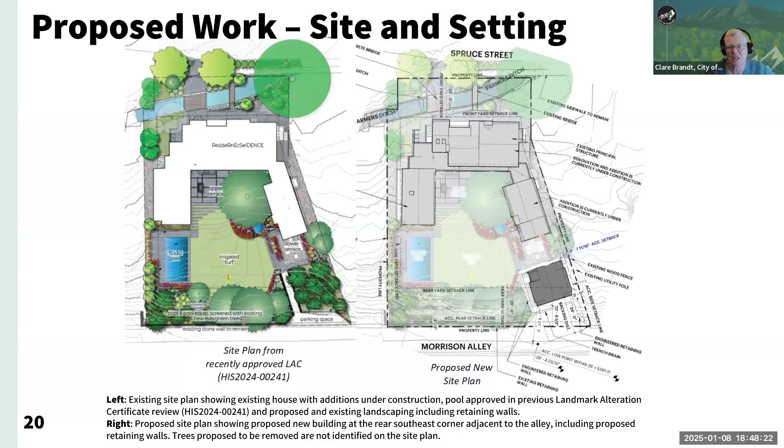The driveway is proposed from the alley, which is right here, to the new accessory building. It's angled to give a minimum of 13 feet to the alley, and it's 23 feet on this side.

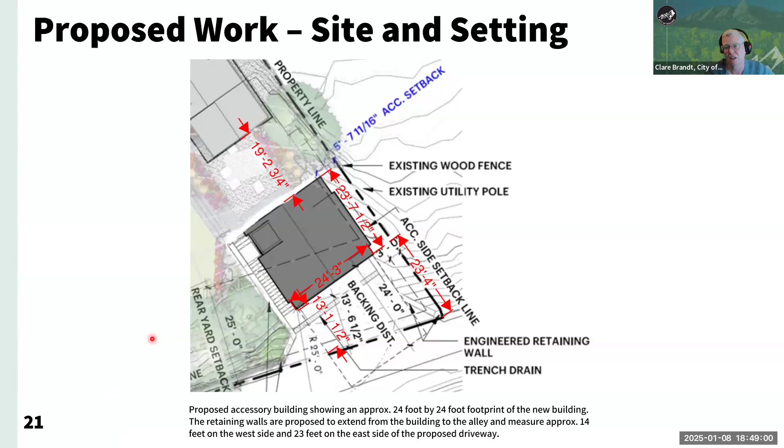The closest existing accessory building is on this side right here, and it's about 60 feet away, so it's not close. There's another accessory building on the other side, which is even further—about 100 feet from the neighboring building on this side.

Our guidelines note that accessory buildings and parking should be at the rear and accessed from the alley, that you should preserve a backyard space and the general proportion of built mass to open space in the area should be retained, and that a new building shouldn't detract from the overall historic character of the principal building or site, or require removal of a significant historic building element or site feature such as a mature tree.

Staff finds that the proposed new building reflects the traditional relationship of the building on the site. It's located at the rear, as you can see, with access from the alley. It does not detract from the overall historic character of the principal building, which is all the way up here, or the site. The proposal is consistent with the general proportion of built mass to open space found within the area, and the backyard area is preserved mainly due to the large size of the lot.

We had in the memo that mature trees needing removal should be reviewed as a condition of approval, but Hal and Skylar are here, and one thing they've let me know is that there are no mature trees proposed for removal, and they can talk to you about that as well.

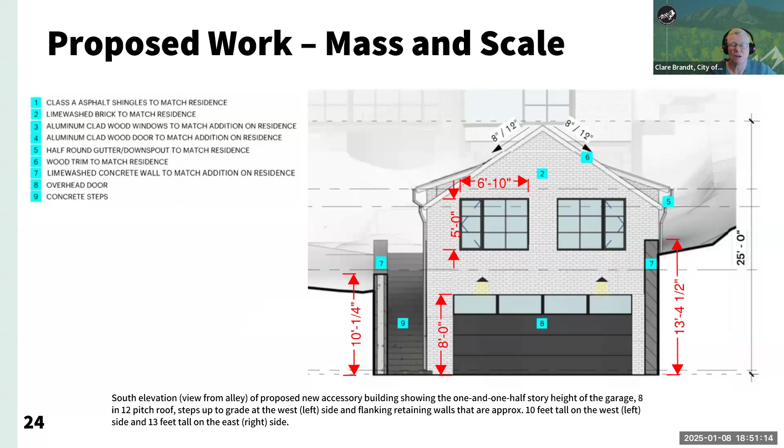It's proposed to be constructed of lime washed brick with a moderately steep pitched front gable roof, an 8 and 12 pitch, pretty shallow eaves, and a pair of wall dormers, one on each side.

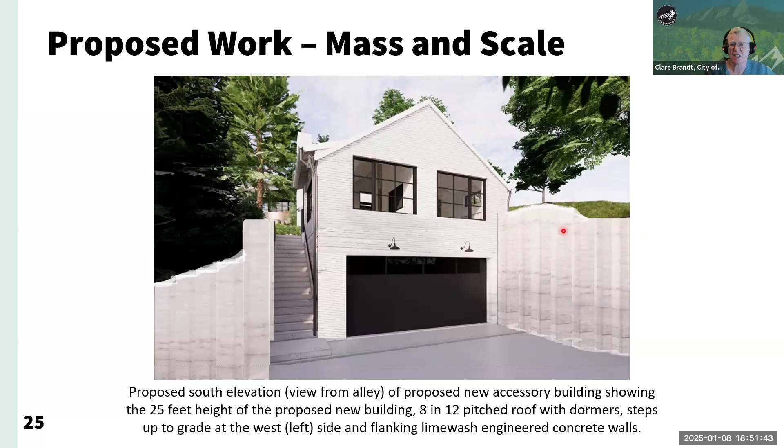There's an exterior concrete stair that follows the west side of the proposed building from the alley grade down here. The entrance of the accessory building is proposed to be flanked by a 10-foot tall retaining wall on this side, and a 13-foot engineered concrete retaining wall on this side.

The guidelines emphasize that accessory buildings should generally be small in scale and secondary to the primary structure. They should be simply detailed. Buildings along the alley should be in a variety of shapes, size, and alignment, should maintain a human scale and be sensitive to pedestrians. Efforts should be made to maintain the character of the alley and respect neighboring buildings and the alleyscape. The roof form and pitch should be complementary to the primary structure, and door and window sizes and patterns should harmonize with the historic context rather than compete with or copy it.

New garages should generally be 1 story tall and shelter no more than 2 cars. And in some cases, a 2-car garage may be inappropriate.

We found that the mass and scale of this proposed new building is subordinate and clearly secondary to the primary building. Its simplicity with a traditional form and punched window and door openings is complementary to the character of the house and alley and harmonizes with the historic context.

The gable roof form of the proposed new building is complementary to neighboring accessory buildings, and in general, the proposed building helps maintain a variety of shape, size, and alignment of buildings along the alley. We did have concerns about the proposed retaining walls and thought that they didn't help maintain a human scale in the alley.

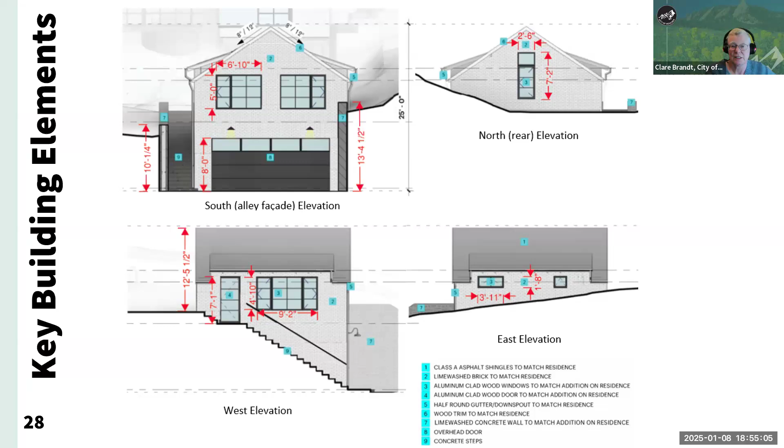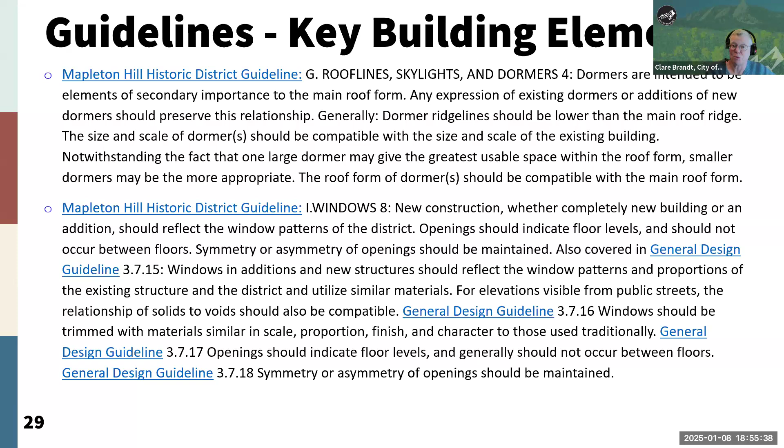So the key guidelines for key building elements include recommendations to keep the dormers secondary elements with ridge lines lower than the main roof ridge, and that the size and scale of dormers should be compatible with the existing building. Window openings should indicate floor levels and reflect the window patterns and proportions of the existing structure and the district, and the relationship of solids to voids should be compatible. Windows should be trimmed with materials similar in scale, proportion, finish, and character to those used traditionally.

This one goes on for 2 pages. The garage doors should be consistent with the historic scale and material of traditional accessory structures. Wood is the most appropriate material, and two smaller doors may be more appropriate than one large door. Doors should reflect the proportions, the height and width of doors in the existing structure and or the district.

And the guidelines also advise to take design cues from the primary structure on the site, but be simpler in detailing and smaller in scale than similar elements on primary structures.

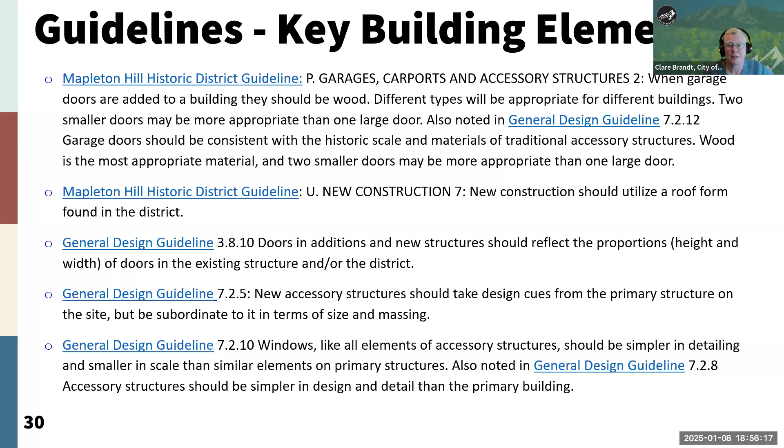We found that the proposed accessory building does take those design cues from the primary building, including the general solid to void ratio of the window and door openings, and the reflections of the architectural style with the minimal ornamentation and divided light casement windows, and the gable roof with slightly overhanging eaves.

The dormers are secondary to the main roof form, lower than the main roof ridge, and the size is compatible with the size and scale of the building. The windows and door patterns for the building are generally reflective of the pattern and proportion found on the primary building, and take cues on size, proportion, and location in proportion to the eaves of the primary building.

The double garage door, we thought maybe two smaller doors could be more appropriate than one large door. However, we're very aware of the alley and how tight it is and how steep the drop off. So we thought that maybe single doors might be impractical for that alley turn, and that this should be investigated and resolved as part of the conditions of approval. And again, Hal can speak to that today.

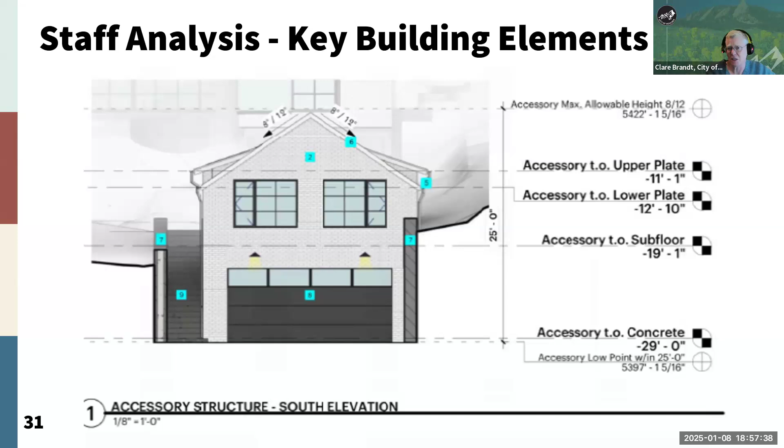The materials proposed for the new accessory building include lime washed brick with wood fascia to match the primary house, aluminum clad windows and doors, and half round guttering. The garage door is proposed to be 2-car overhead. The retaining walls and exterior steps are proposed to be concrete, and the retaining walls are proposed to be lime washed.

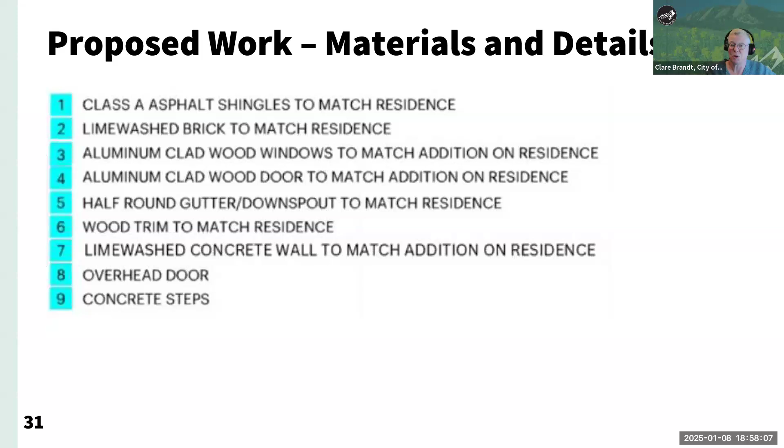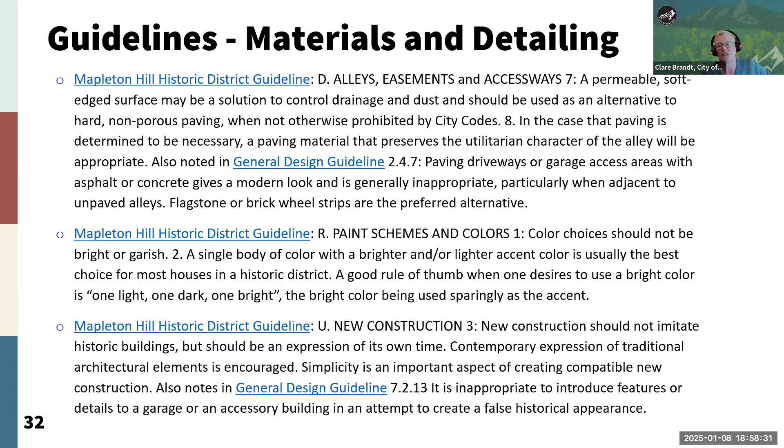The guidelines for materiality and detailing favor the use of a permeable soft edge surface over hard non-porous paving or concrete, which gives more of a modern look and is generally inappropriate. The guidelines also say that color choices should not be bright or garish, and there should be simplicity in new construction.

Building materials should help establish a sense of scale and be compatible with those found on the primary structure and in the district, including the use of wood garage doors. Again, a recommendation to use wood.

On retaining walls, the guidelines state that tall, plain concrete retaining walls are inappropriate, and regrading and the introduction of new retaining walls is inappropriate.

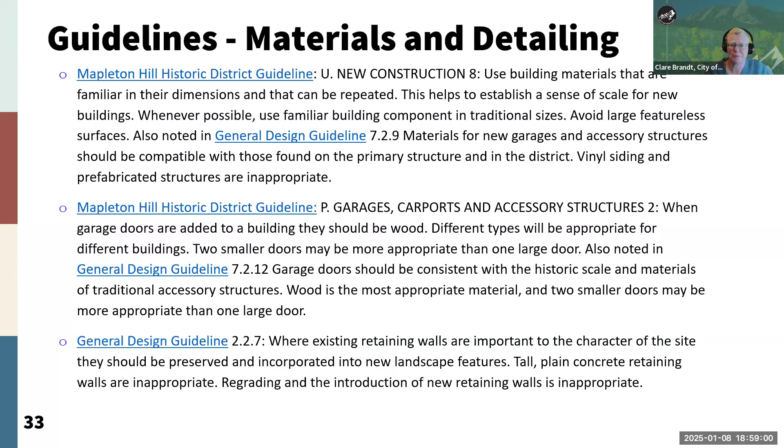We found that the proposed use of concrete for the engineered retaining walls gave too much of a modern look and would be inappropriate in the context of the historic district in this alley, and recommended that the retaining walls should be redesigned to reflect the design, materiality, and character of existing stone retaining walls found on site.

Additionally, the proposed driveway should be permeable, not concrete, and crusher fines, flagstone, or brick could be specified as a condition of approval.

We thought that the lime wash white brick proposed for the building is reflective of the primary building.

Usually we say that wood doors and windows are most appropriate for the historic district. However, the aluminum clad windows are reflective of the primary house where steel windows were used, and it also identifies the garage as new construction and of its own time. Staff considers that aluminum clad windows are appropriate in this location.

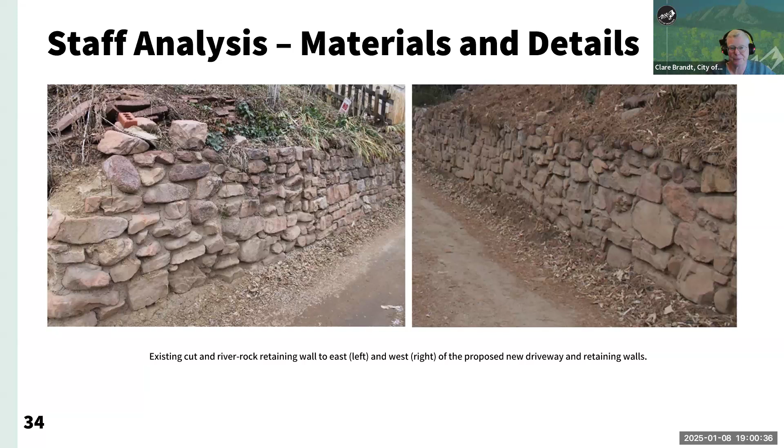Staff let us know that the garage door will be proposed in wood, but we should also review the lighting as part of the conditions of approval.

So in addition to compliance with the guidelines, the standards for issuance of a landmark alteration certificate are outlined in 9-11-18B of the Boulder Revised Code.

The issuance must meet the conditions of whether the proposed application preserves, enhances, or restores and does not damage or destroy the exterior architectural features; whether the proposed application adversely affects the special historic architectural aesthetic interest or value of the property; and if the architectural style, arrangement, texture, color, and materials used on existing and proposed structures are compatible with the character of the landmark property.

We found that the proposal meets the standards for issuance of a landmark alteration certificate, and is generally consistent with the Mapleton Hill design guidelines and the general design guidelines, providing the stated conditions are met.

The buildings at the rear respect the traditional relationship of buildings on the site, and do not detract from the overall historic character of the principal building or the site.

It is consistent with the general proportion of built mass to open space. It's subordinate to the primary building and helps maintain a variety of shape, size, and alignment of buildings along the alley, and takes design cues and is reflective but not replicative of buildings in the district.

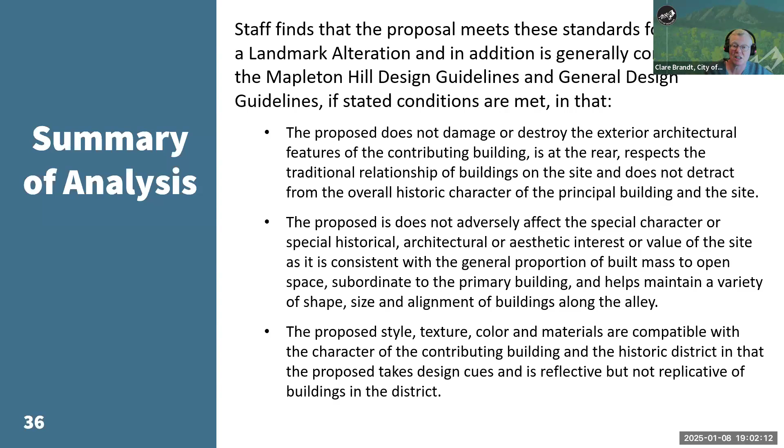The conditions of approval should address the following to be consistent with the guidelines: that the proposed use of concrete for the engineered retaining walls gives a modern look and is inappropriate in the context of the historic district, and that the proposed driveway should be permeable, not concrete.

A pair of single car garage doors would be appropriate unless it can be demonstrated that this is impractical for the alley turn, and that removal of mature trees should be avoided if possible.

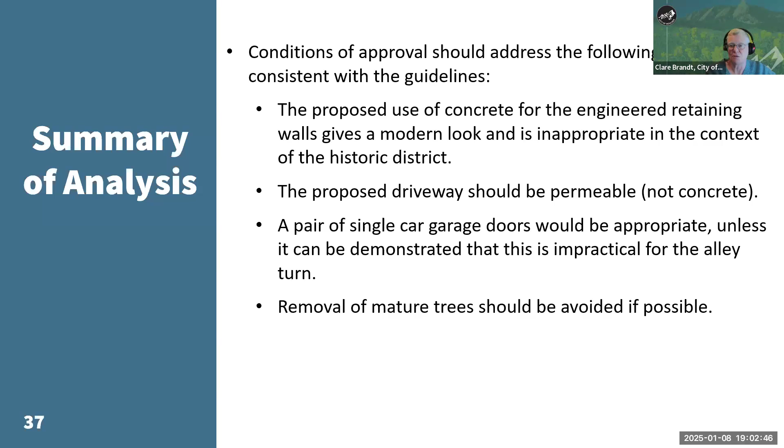The staff's recommendation is to approve the application with conditions, finding that it meets the standards of issuance and is generally consistent with the guidelines, provided the stated conditions are met.

We provided some draft conditions that would include revising the retaining walls to reflect the design, materiality, and character of existing stone retaining walls found on site; revising the design to transition and visually blend the existing and proposed retaining walls; revising the design to show a pair of single car garage doors unless it can be demonstrated that this is impractical for the alley turn; noting mature trees to be removed; and providing details on materiality for the driveway, the garage door, and exterior lighting.

We also had a note in there that the proposal may require the closing of the Spruce Street curb cut, and that the applicant should provide details on how that would occur if that is the case.

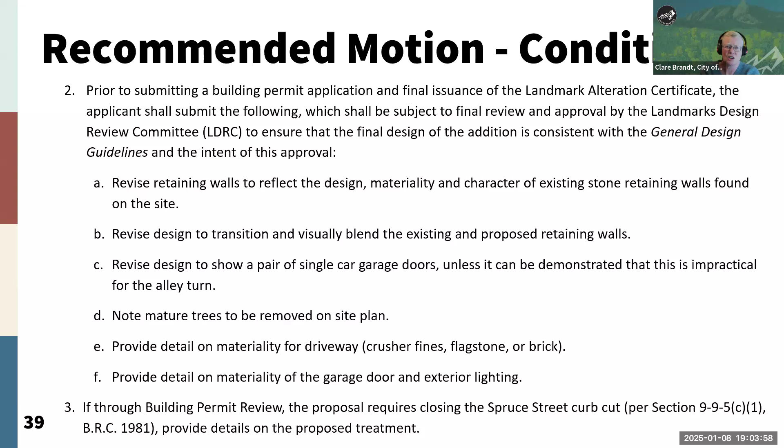So we recommend that the Landmarks Board find that the project meets the standards of issuance.

Yeah, I'm not going to go over this again. Sorry, it's a bit repetitive this time. I don't know what happened.

Okay, so board deliberation. We've allocated about 30 minutes for deliberation, and generally the question is whether the project meets the standards for issuance. I've said them enough that you probably get them, but here are some additional prompts if you need that to help the discussion, we can bring those back up.

So that's the end of the staff presentation. Next steps in the process: the owners, Hal and Skylar, are here and they have up to 10 minutes to present to the board. The board may then ask questions, and we'll then hear comments from any member of the public who wishes to speak. The applicants may have additional time to address anything said during public comment, and then the board will deliberate once everybody has muted their computers again.

So any questions for me before we hand it over to Hal and Skylar?

Clare, I don't have a question, but thank you for that incredibly comprehensive and thorough presentation. I really, really appreciate it. That was amazing. All right.

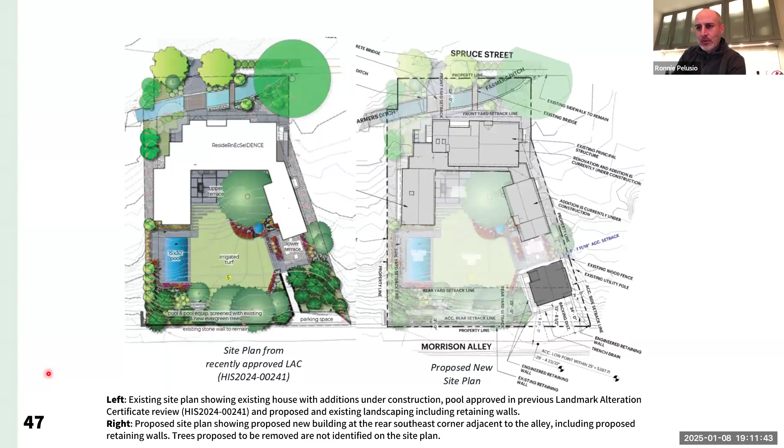My question really, Hal, and I hope to have a conversation with my fellow board members about this, is whether or not the wall is actually as tall as what is shown in the 3D model, and if there's an intention to step the wall down to lower it at the alley. Also, I'm assuming that this might be taller than what is needed, but it might not be. And my last question is, have you explored tiered walls as opposed to one large vertical plane?

Yep. So that's actually probably the most relevant thing to talk about for this, because the original design, which was where these images came from... concrete walls are not really our favorite, or even engineered walls. One of the things we've been discussing with our landscape architect, and we met with our builders this week as well to talk about this—

is can we use more natural stone to build a stone embankment that goes up, because we have a lot of red stone and other stones from the property that we've pulled out during excavation, and we would much prefer it to be a stone wall and or sort of stone tiers like what you're talking about. I don't think that we need this tall of walls, to be honest. That's one of the things we're just going to have to explore.

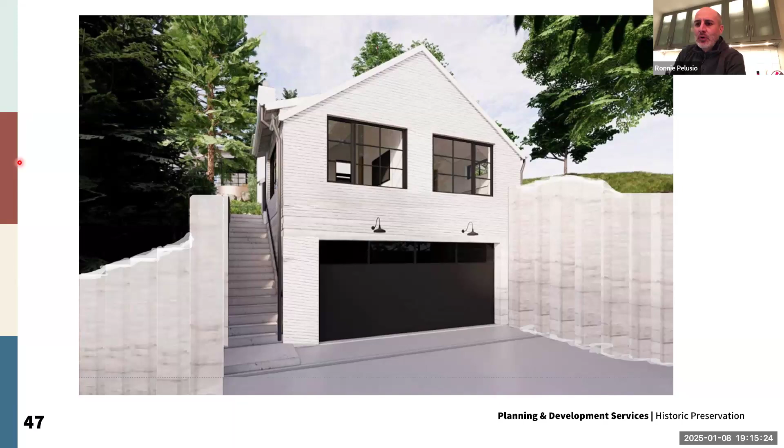Okay, that's helpful. I think I have some direction to maybe have a discussion with the board, and if we have more questions, we might have the opportunity to ask more if they come up, but I feel like my questions are currently answered. Yeah, to your point, there is a horizontal line that goes across the main house, and it's all concrete below that line and brick above it.

Got it. And then the original house itself is in stucco and brick. Okay, I think I understand it.

Thank you. Renee or John, any questions for the applicants before we turn to public comment for this item?

I have two questions. One is about the windows on your addition. I saw in one of the 3D renderings it looked like it had a fixed piece of glass with divided lights - is that different from the rest of the house? Oh no, it's actually very similar to both the windows on the original house and the windows on the addition. Okay, so it was just the 3D rendering - sometimes the lines don't come through clearly.

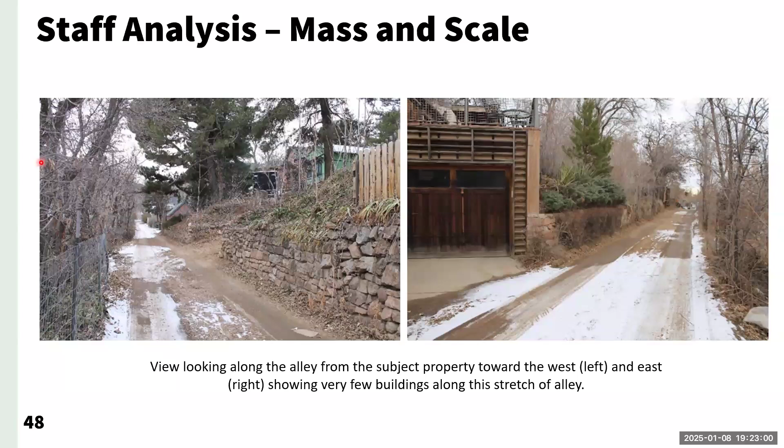Hi everybody. Well, I was involved, gosh, when James Hewat was still with us, and we discussed this property and the historic stone wall. This is a question as much as anything that will go to Marcy and Clare. At that time, as I remember, the wall was declared to be a contributing feature of this site, and pretty much part of the site, not to be disturbed. So I'd like some background on how we got from it being a really important part of the site to so much of it now removed. I went through that alley in the last few days, and it seems more than 20 feet of that wall has been removed. I'm wondering what the process was for getting permission to remove that wall.

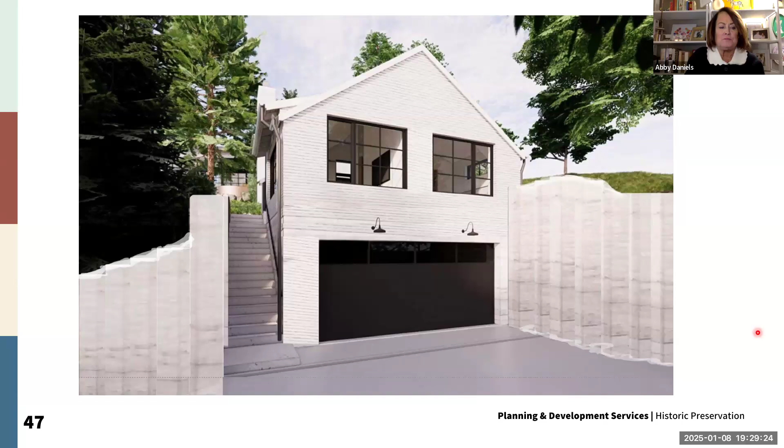Welcome, Fran. I'm going to ask you to swear to tell the board the full truth, then state your name once more for the record and begin. Okay, I promise to tell the truth and my name is Fran Sheets.

I think I have a couple things people probably aren't going to like, because I was here in 2020 when the other approvals came in on the house additions, and I really feel like the back end of this lot has been dramatically changed. It's a reflection on a really historic, rare historic alley, and I think it needs to be done really carefully.

I remember very distinctly trying to defend that wall that James claimed was very historic, and I measured 25 feet of it gone. I'm wondering how that happened, because I remember James being quite clear he didn't want that wall disturbed. The whole back end of the lot, if I remember correctly, has been changed dramatically, and this adds to it.

I know we need to put up all the ADUs in this town that we possibly can, but I think this is larger than anything else on that alley. I would like it to blend into the alley and not stand out as much as this drawing appears to do. I would really love to know how we can repair the lost historic wall there, and how we can let it sit down a little more in terms of the history.

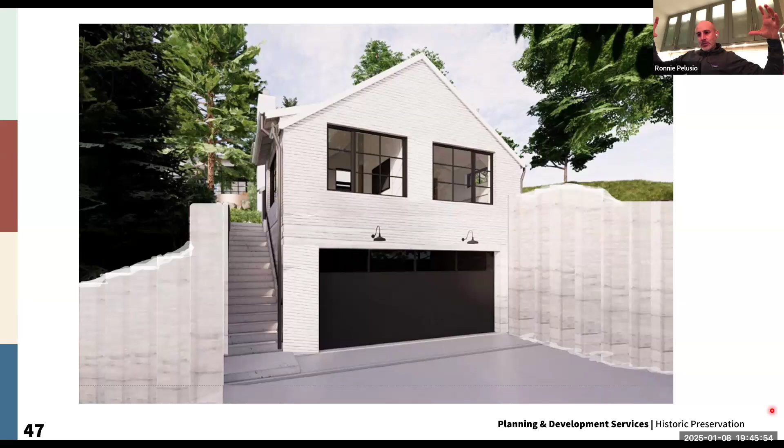Other things I wanted to point out: the rendering currently shows brick surrounding all openings on all sides without the demonstration of either sills or lintels. I don't know what the new structures are doing and whether or not they demonstrate them. I'd be curious. But I do think the principal structure does at least show lintels in certain locations, which is the header above the windows. There's a couple of pieces to this that are complicated, but I'm going to add one more piece and then come back to the sills and lintel talk.

The reason I was asking about the back of the original house and whether or not the foundation was a concrete foundation is just that my gut reaction to seeing this building is that it looks like it kind of doesn't have a base. And I think it is approvable as a single material. So I think this one material approach is approvable.

I think that if we pursue my recommendations and staff's recommendations to change the material of the concrete retaining walls, it'll be even more compliant as proposed as a single material. But I do think some detailing of a base to this building and how it relates to the earth may help improve it. It'll make the building look like it's sitting, and I think it'll be a more accurate reflection of how the building relates to topography.

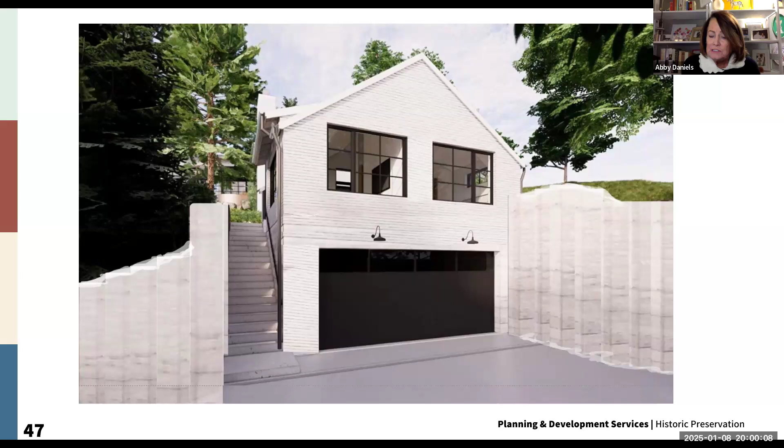But I do think that the issue is, as everybody has explained, the walls. And while tonight isn't the venue or the place to redesign this and to do that, I'm wondering how we can move forward with addressing those concerns and putting some conditions about how maybe that collaborative conversation can help happen at LDRC. So I want, especially people like Ronnie who can help sometimes facilitate that. I also want to give Kurt an opportunity to weigh in on this.

Hi, thank you. It seems like the board has done a really good job of talking, particularly about the wall, which obviously is a concern for me as well. And I think that some really good ideas have been discussed. So I think the conditions that are being proposed are appropriate.

I do want to talk about the garage door, and you've heard me talk about this before. I feel like these wide garage doors, 17 feet wide or however wide, really do have a significant impact on the feel of an alley as you walk down it. And I think that the design guidelines are very wise in not completely ruling them out, but generally advising against them and saying that they, in general, are not appropriate. And I think that is because they are absolutely ahistoric and do definitely change the feel of the alley, which to me is, the alleys are so important, especially on Mapleton Hill, and to significantly change the feeling of the alley as a pedestrian walking down it, I think is something that we need to be very careful about.

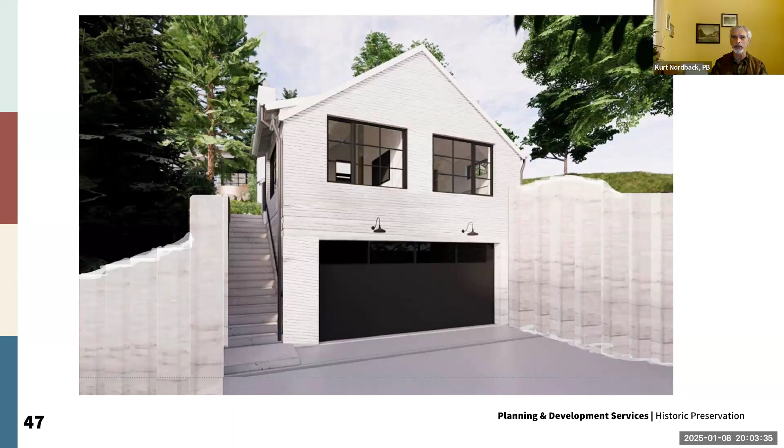And I feel that we should do the same with these garage doors. So I would be strongly in favor of requiring two single garage doors instead of the one double. Thank you. Thank you, Kurt. And this is more compelling evidence of why you're really going to be missed as a liaison. But so, coming back to

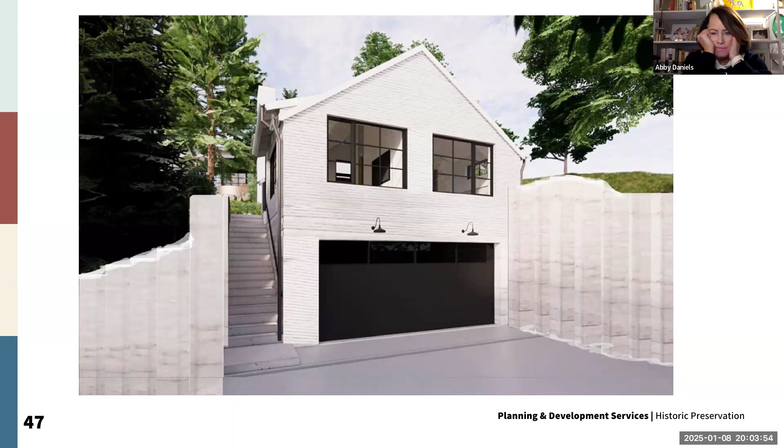my board members about how to move through this evening, without having the luxury of a collaborative conversation like at LDRC. Is it as simple as putting on the conditions you guys would like to see?

I think this can be accomplished with conditions, and it looks like some revisions to the original proposed conditions have already been put up. So maybe we could review those. Am I correct, or? Yeah, we would invite you to look at these carefully. I think some of them may be redundant with some of the other ones. So if it's all right with you, I'll read through them, and then you can either combine them or clarify them, and we will move towards the conditions. Let me just pull up a slide so I can take notes as well.

Okay, so A: revise retaining walls to reflect the design, materiality, and character of existing stone retaining walls found on the site. B: revise design to transition and visually blend the existing and proposed retaining walls and sensitively integrate them into the topography and alley. C: explore reduction in wall height to use terraced walls no taller than 36 to 42 inches in height.

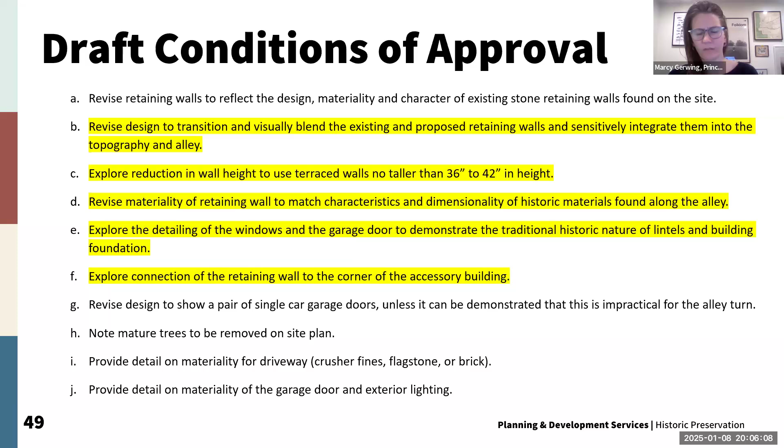I think this is a great list. And I do see that letter A, the original proposed condition, does capture many of the other retaining wall topics. What I would recommend is that we keep the more fine-grained information documented in B through F. We might be able to get rid of letter A because it seems like letter A is captured in greater detail in B, C, D, E, and F. I agree with that.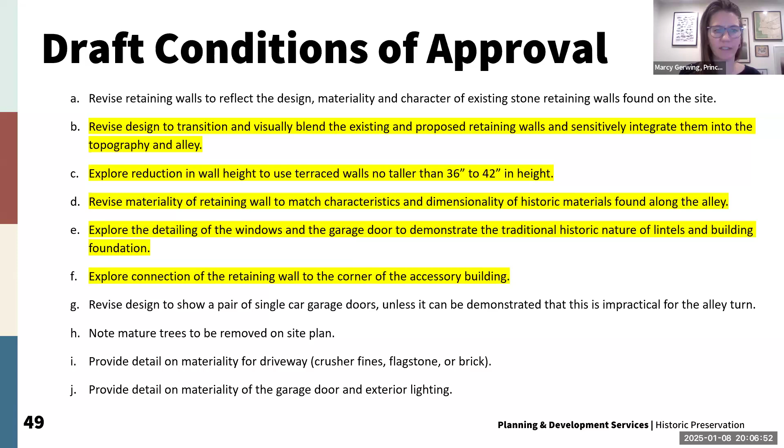Okay, it should update in a second, but I just took it out. There we go. So I think that this captures everything that we spoke about. I do want to come back to Kurt's point, but maybe if others want to talk about the draft conditions here first.

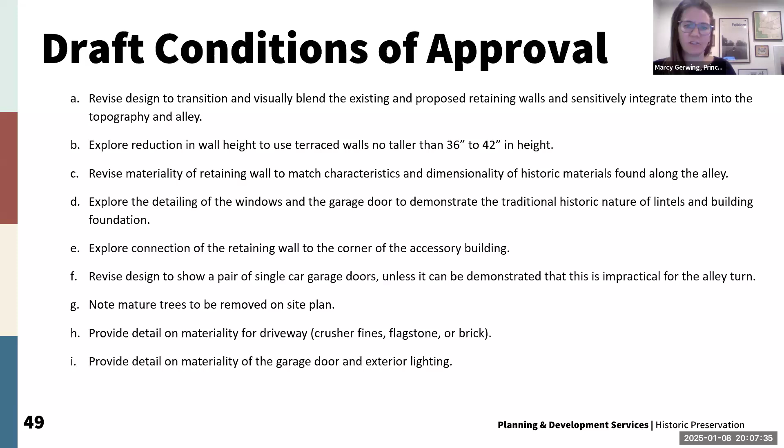And could I ask for a clarification? This is our roadmap for the LDRC, which two of you will be selected to review the final design along with staff. Is D going to make sense in a few weeks? Could you help me clarify that one? D: explore the detailing of the windows and the garage door to demonstrate the traditional historic nature of lintels and building foundation.

Yeah, it's kind of two points. I think they can be together. But what I'm recommending here is that the applicant team take a look at the ways in which the other windows and doors are treated with a header, that is the lintel, on both the principal building, and then I'm not sure how you did it on the newer proposed buildings, but it would be nice to see those and make an informed decision about how the detailing of this building relates to the two of them.

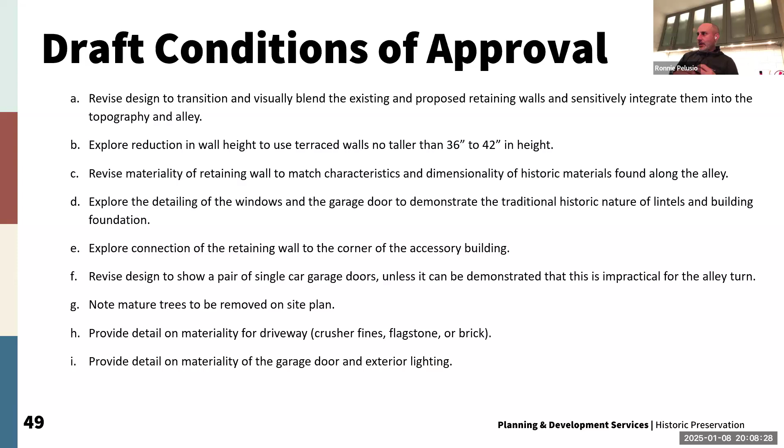My instinct is that the other part here, about the building's foundation and base, is really about looking at whether there's an opportunity to reinforce the base of the building. Right now it shows the brick going all the way to the ground, which might happen, but there's sensitivity to how that foundation, the stepping stairs, and where concrete shows up and doesn't, and the support for the concrete appears. I think the massing model really is just a wallpaper application of brick.

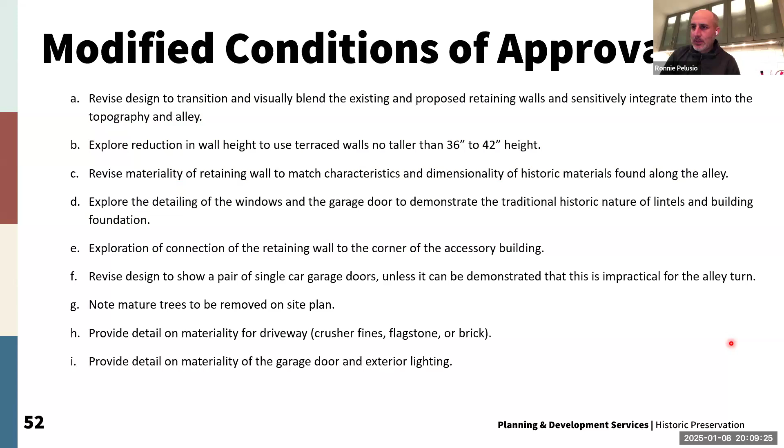And I think that's good, it captures the intent at this point. I know I haven't really directed you, Marcy, on how to rephrase this, but I think you could leave it as written. Yes, I appreciate the clarification and would be able to follow through with the conditions.

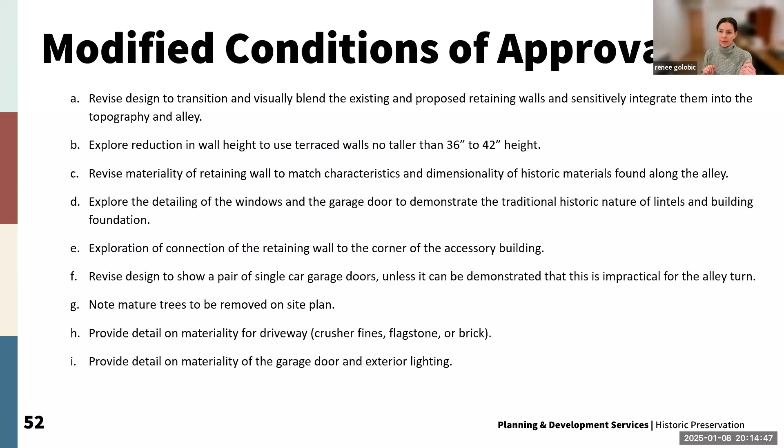So is that work, or how would you have rephrased that, Ronnie? I think it's written in the right way for what you and John are suggesting, and so I would propose that we leave it like this. The alternative, and I think we should have a discussion that's not this board meeting about the direction of these decisions, so that we're making it more our cultural approach to this policy, as opposed to doing it right now in this meeting. But I think it's written in an adequate way for us to bring this to LDRC, and I would love to make a motion.

Oh, we'd love for you to make a motion. Okay, as I go to the motions coming up here, I just want to compliment the applicant for their excellent designs. I think this has been a really good process. I think the applicant and the applicant team has been very thoughtful in everything they've been proposing, as we've looked at additions to the back of the property, other elements related to the landscaping and the pool. So I just want to compliment you guys. I know we kind of beat this up a little. I do think it will improve the project, and I think it'll be something to continue to be proud of.

So I move that the Landmarks Board adopt the staff memorandum dated January 8, 2025 as the findings of the board, and conditionally approve the application for a landmark alteration certificate to construct a new accessory building at 600 Spruce Street, HISD 2024-00283, a contributing property in Mapleton Hill Historic District pursuant to section 9-11-18 of the Boulder Revised Code 1981, as shown on application dated October 29th, 2024, finding that the proposal meets the standard for issuance of a landmark alteration certificate in chapter 9-11-18 BRC 1981, and is generally consistent with the Mapleton Hill Historic District guidelines and the general design guidelines for Boulder's historic districts and individual landmarks.

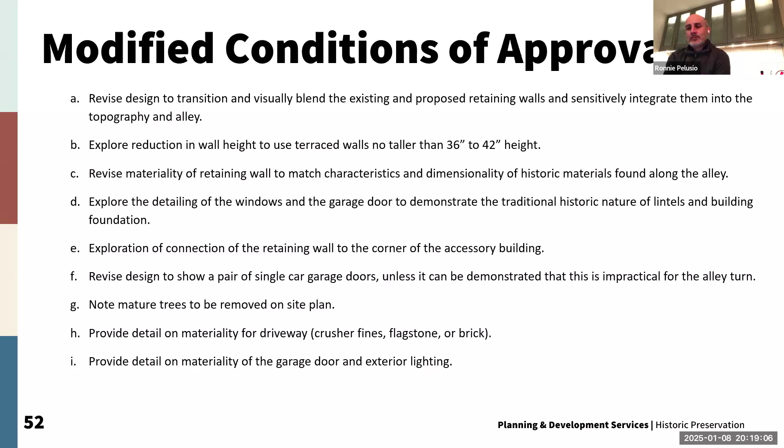Thank you, Ronnie. Any second? I'll second. Thank you. On a motion by Ronnie, seconded by John, we'll do a roll call vote. John? Aye. Renee? Aye. Ronnie? Aye. And I vote aye, so the motion passes unanimously, and Claire will briefly go over next steps for the applicant.

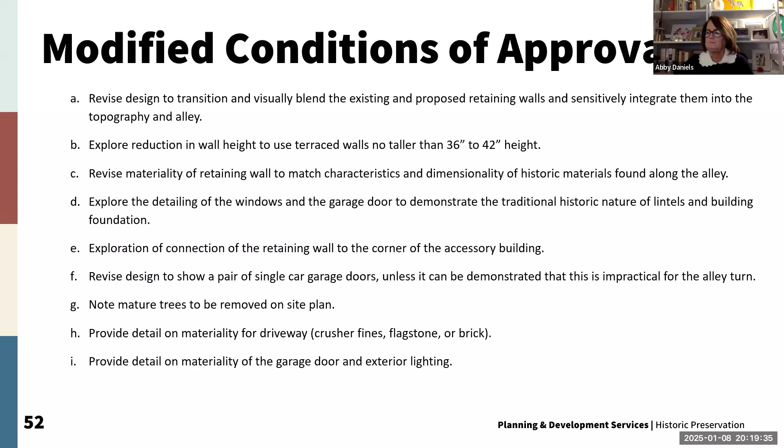Yes, thank you. Thank you, Hal and Skylar. City Council has up to 16 days to decide if they want to review or call up the decision. If they do not call it up, the conditions of the LAC will be reviewed by the LDRC, and then once the conditions are satisfied, the LAC will be issued. In the case that the City Council wants to review the decision, we will schedule a hearing within 45 days, and let you know. So thank you for your time today.

Thank you. Thank you. We will move on. Thank you, guys. Bye. Although you're welcome to stay for the rest of our meeting.

We will move on to agenda item 5B. It's a public hearing in consideration of an application to demolish a building constructed circa 1920 at 3132 8th Street, a non-landmarked property older than 50 years old, pursuant to Section 9-11-23 of the Boulder Revised Code 1981, and under the procedures prescribed by Chapter 1-3, quasi-judicial hearings, also Boulder Revised Code of 1981.

I believe Marcy's doing this presentation. No, it's me again. Oh, I'm sorry, my apologies. I had a 50-50 chance.

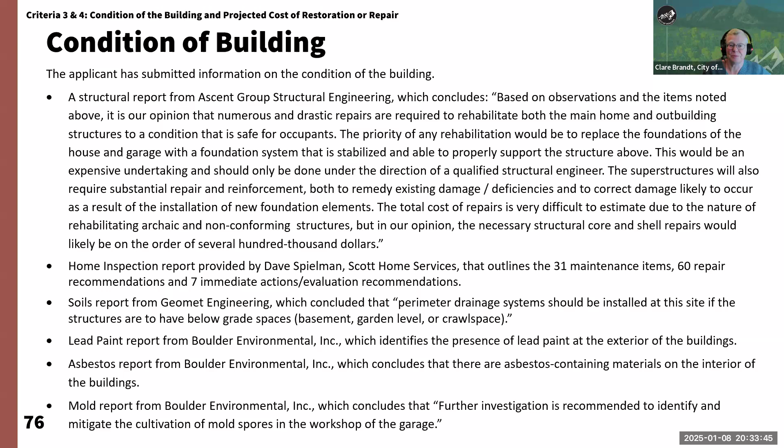The applicant also provided information about the projected cost of repair, also included in the packet. They're here, they can answer questions, but in summary, staff considered that the projected cost of rehabilitation of both the garage and house is a lot higher than the average rehabilitation project with a similar scope.

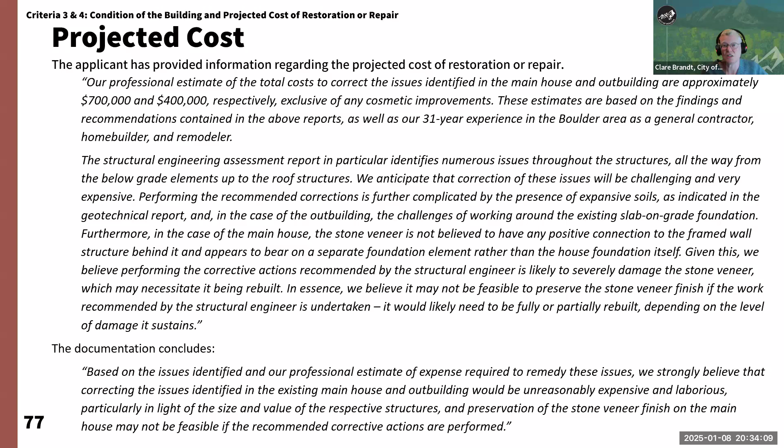Staff's findings are that the building is eligible for designation as an individual landmark, consistent with the purposes and standards in section 911.1 and 911.2, and based on the significance criteria. However, the applicant has demonstrated that the condition and cost of restoration or repair is unreasonable, and therefore a stay of demolition is not appropriate. In addition, the cost of restoration or repair and the condition of the buildings are not due to unreasonable neglect, but rather due to the unusual application of the stone veneer to the existing frame building, the inadequate roof and floor framing, and a shallow foundation. The character of the neighborhood has somewhat diminished over time, and the loss of this building would not constitute a significant impact on Boulder's historic resources. So staff considered that approval of the demolition of the house and garage at 3132 8th Street is appropriate, based on the criteria set forth in 911.23F of the Boulder Revised Code.

So our recommended motion is that the Landmarks Board approve the application to demolish both buildings. That's the end of the staff presentation.

The next steps in the process are that the applicant has up to 10 minutes to present, followed by public participation, and then an opportunity for the applicant to respond to anything that's said, and then board deliberation.

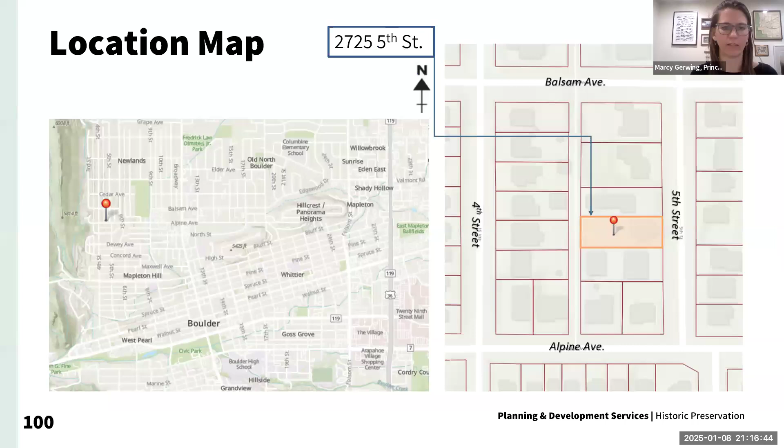The one-story vernacular frame building has a flared hipped roof and a rectangular footprint with shed roof additions on the south side and the west, which is the rear elevation. The house is elevated on a rubble foundation parged with concrete and scored to look like stone.

An elevated hipped roof porch has flared roof detail, simple porch supports and railings with vertical lattice below, and is accessed by wooden steps. The entrance door is flanked by double hung windows, which appear to be original, and the building is clad in narrow horizontal lap siding with corner boards and simple trim detailing.

The south elevation of the house includes a double hung window and a shed roof projection with a series of square fixed pane windows. This portion of the building is clad in the same narrow siding with simple window trim. There's also a small shed roof dormer on this elevation with a pair of single pane wood windows.

The rear elevation includes a hipped roof dormer with a boarded window opening and a shed roof projection that has a double hung window and exposed rafter tails. A second double hung window is located on the north of the shed roof projection.

The side north elevation includes four window openings, two smaller square windows flanked by vertically proportioned double hung windows, and a portion of the rear hipped roof projection is visible from the front of the house and has a divided light door and aluminum storm door.

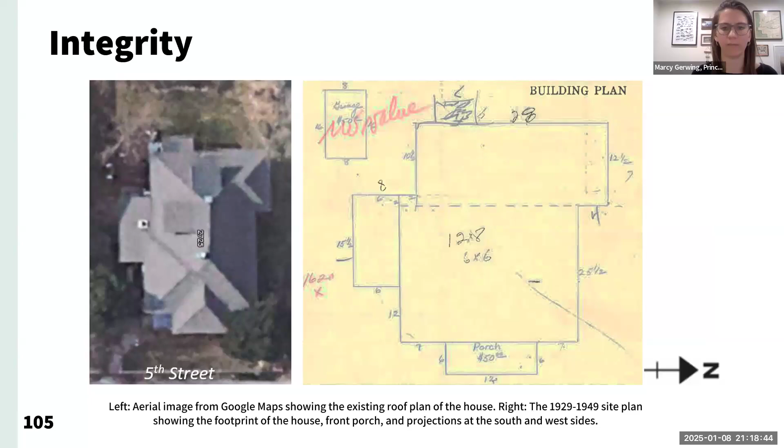Looking at the integrity of the building - that is the ability of the property to convey its historical associations or attributes - the house was constructed around 1910 and in general retains its historic integrity. The building is in its original location, and the design does not appear to have been modified since around 1929, when the tax assessor sketched the footprint of the building.

The building retains much of its historic materials, including the lap siding, windows, and concrete foundation, and the doors and the wood shingle roof have been replaced. The building demonstrates vernacular workmanship typical of its original construction, and the building's ability to convey a feeling of its time has not been diminished.

The setting of the house on the property with a lawn and decorative plantings has not changed, and the area remains residential. In general, the building retains its ability to convey its association with the early residents and architecture.

The staff analysis of the criteria looks at the eligibility of the building for designation as an individual landmark, and we'll look at the significance criteria that the Landmarks Board adopted in 1975. We'll also look at the relationship of the building to the character of the neighborhood, the reasonable condition of the building, and the projected cost of restoration or repair.

The historic significance considers the development, heritage, and cultural characteristics of the community. While the building located at 2725 5th Street dates from around 1910 and has been associated with many people closely connected to the Boulder, Colorado Sanitarium and nursing practice, staff does not consider the property to possess a high degree of historic significance. The property itself was not the site of a historic event that had an effect upon society, nor does the building show character, interest, or value as part of the development of the community.

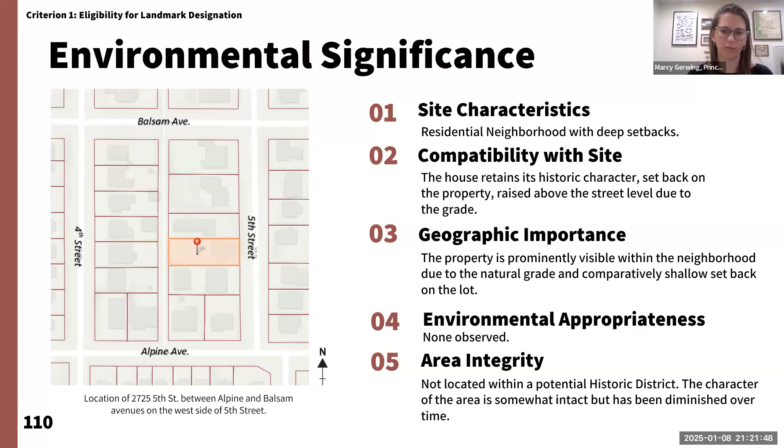The environmental significance criteria considered the sense of identity created by the unique natural or man-made environment. Staff found that the building and property does not have environmental significance in that it's not representative of unique environments or landscaping, and the property is not located within the boundaries of a potential historic district.

While this was one of the earliest houses constructed along 5th Street, which had a streetcar line until the area became primarily residential during the building boom after the Second World War, the area today has been somewhat diminished over time and comprises buildings predominantly constructed between 1950 and 1970, with a handful of modern buildings and pre-1929 buildings. With the exception of the subject property, the buildings generally maintain deep setbacks, and the naturally steep grade with lots falling from the high point at the west has helped maintain a bit of the character of the area.

Moving to the condition of the building, the owner submitted information relating to the lead paint, the roof replacement, repairs to the dormer wall and missing window, as well as some drywall repair on the interior, and a letter from the structural engineer, which reads that the roof framing should be reinforced with new rafters and beams, and the rubble foundation would need to be replaced with a proper concrete foundation extending to the proper frost depth, and soil cuts would need to be retained with properly designed retaining walls.

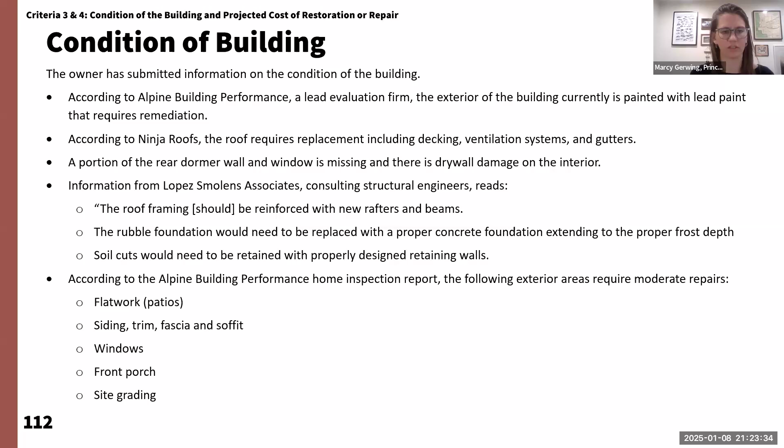The projected cost provided by the owner relates to a number of the items previously mentioned, but not all of them, including remediation of the lead paint, roof replacement, rear dormer repair, and window replacement, and upgrading the electrical system.

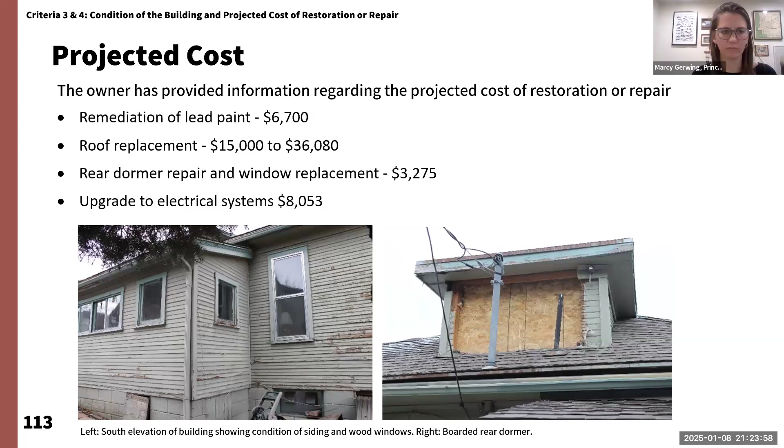So with that, staff recommends that the Landmarks Board approve the demolition of the house at 2725 5th Street, finding that the building is not eligible for individual landmark designation consistent with the purposes and standards in 911-1 and 911-2, in that the property does not possess a high degree of historic significance, as the property itself was not a site of a historic event that had an effect upon society, nor does the building show character, interest, or value as part of the development of the community, nor does it exemplify the cultural, political, economic, or social heritage of the community.

Additionally, the building is not a significant example of the architectural style of the past and does not have architectural significance, nor does it represent a unique natural or man-made environment. And the property is not located within the boundaries of a potential historic district. The second finding is that the historic character of the neighborhood has been diminished over time, and the loss of this building would not constitute a significant impact on Boulder's historic resources.

So we have prepared recommended motion language, and that concludes my presentation. I'm happy to answer any questions that you may have.